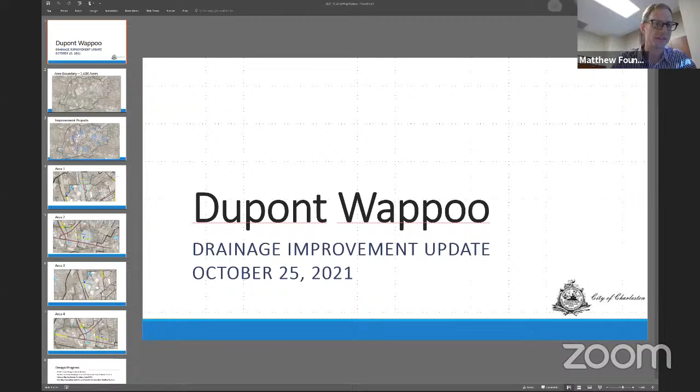Okay. So this is just a brief update on where we stand on the Dupont Wappoo Drainage Improvement Project. And Mr. Chairman, I can actually give you a quick update on the area that we're talking about in that email separate to this as well, as I've been talking to the county about that area for the last few months. But obviously the Dupont Wappoo project area is this large 1,600 acre basin, somewhat focused around the intersection of 526, Sam Rittenberg and Savannah Highway.

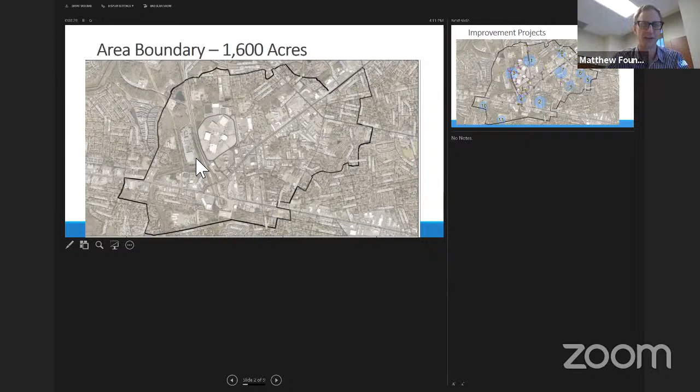We had identified previously, as you're all well aware, 11 total project areas, 10 of which are public projects. The 11th is actually located within the school property, but we did identify it as an area where there was a potential for drainage improvement. It's just all within the public school property under the school's jurisdiction.

Before you go back, you see the areas of 10 and 11, and then at the base of 4, all those little yellow dots down there. I suspect that's Highway 17. Is that Savannah Highway? Yeah, I can certainly provide a little more context here. Savannah Highway is sort of the large double line that runs right across the page here. Well, my question is about that area below that.

In other words, my understanding now is some of this area comes underneath Savannah Highway and eventually goes over by the mall and comes back underneath Savannah Highway out to the Stono. This area where 10 and 11 is. Mr. Chairman, I think instead of it being over on 10 and 11, which is the marsh outfall by Clayton Drive, you're probably looking at this area over by the Ruby Tuesday's south of Highway 17. That's just south of area 2 here, where the new Home2 Suites are.

Right. Yes, and you're right, it's on the southern side of 17 like that. That area does sort of flow either north or south, depending on where the flooding is and where the drainage issues are. We've been looking at this area with the county, a series of a couple of different projects. One in Councilman Appel's district on some of the townhomes down here to add a little bit of storage and improve some of the drainage swale.

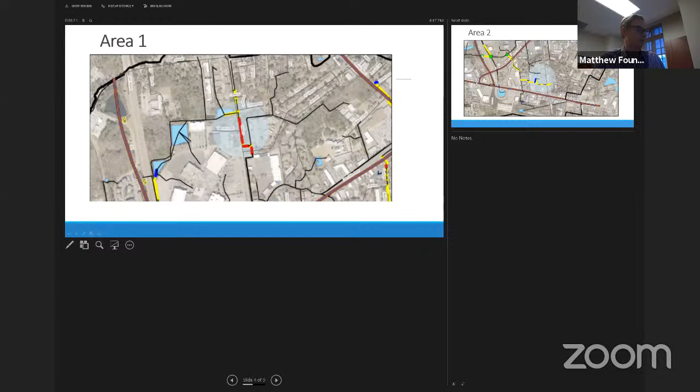These aren't the easiest things to see, but project 1 focuses on Orleans Road at the north end of the Citadel Mall, and the improvements here are mostly looking to provide relief to the Hazelwood, Taborwood area that comes down into this large drainage canal through the apartment complex and then across Orleans and back behind the Citadel Mall.

Those will tie into one of the other projects that we'll see in a second on the area numbers. Area 2 is sort of the area that parallels Savannah Highway. There was previously a round parking lot car dealership here that's been vacant for a little while. And that water flows from Dupont across through Orleans, through the Town and Country property, and then kind of up through a canal across Sam Rittenberg, and then eventually into that Citadel Mall canal system.

Area 3, this actually ties into area 1 that I talked about before. So area 1 was the improvement over on Orleans. That water then has to flow to the north of the Citadel Mall down by 526. This is improving the section that runs parallel to 526 to help the water get down to the outfall. We've been in quite a few talks with the Citadel Mall Epic Center developers about how this should look.

We're looking at an open drainage system right now where we bring it into, in the short term, like a big canal, then in the slightly longer term, working with the developers to build this into more of like an amenity or recreational aspect for the mall property, where they could basically landscape it and beautify it and make it a development draw to the mall property to have a beautiful outdoor water feature that runs through the parcel basically.

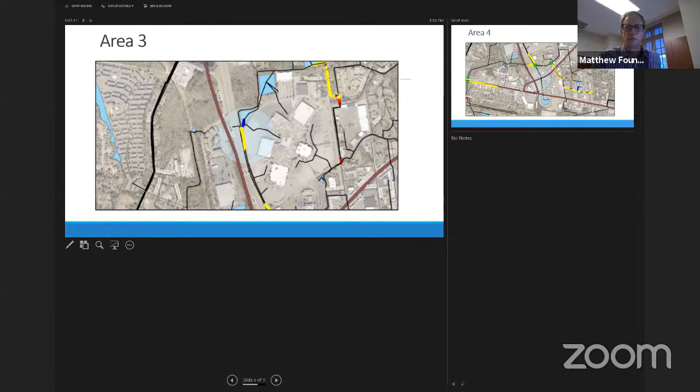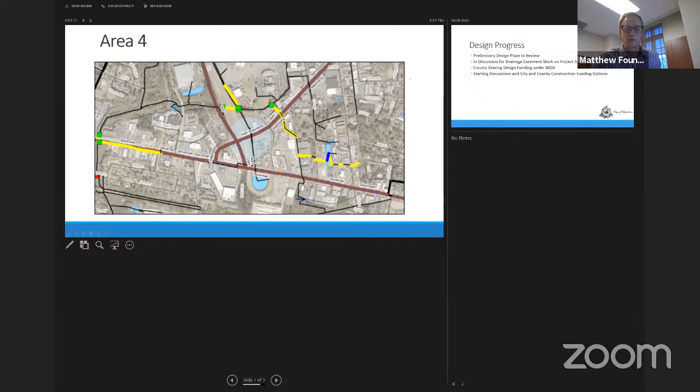Area 4 is actually the improvements on this mall property section here, adding some check valves and limiting some of the impacts when we get major tide events that pull up into the system and eliminate a lot of that open storage capacity. So we do have preliminary design plans complete for all 4 of those project areas. At this point, we've been working with the county to review those design plans so we can return them to AECOM, but the initial design work showed that we were likely to need some drainage easement adjustments in project areas 2 and 3.

Project area 2 is the area that runs sort of from that round car dealership down through the Town and Country. And then project area 3 being the backside of the Citadel Mall. So those 2 areas, we're working with those 2 property owners to see if they'll grant drainage easements and shift easements around to be able to do those drainage improvements. We're also currently under a cost sharing agreement with the county for the design funding on a 75-25 split. And now we've been starting to look at what appetite and financial capability the county would have for a construction cost sharing agreement as we move forward.

Let me ask this. That's 75-25. How did we come up with that split? Yeah, absolutely, Councilman. Both of these projects were being funded out of the utility accounts for the 2 entities, which need to be spent to benefit ratepayers. So we laid it out based on how much jurisdictional area each entity has within the Citadel Mall Basin. The city has about 75% of the annexed area within the basin, and the county has about 25% in unincorporated. That's what I thought, but I thought more of it was in the county than that. There's a lot of parcels in the county, but a lot of the area is in the city because some of the large parcels like the Citadel Mall are within the city.

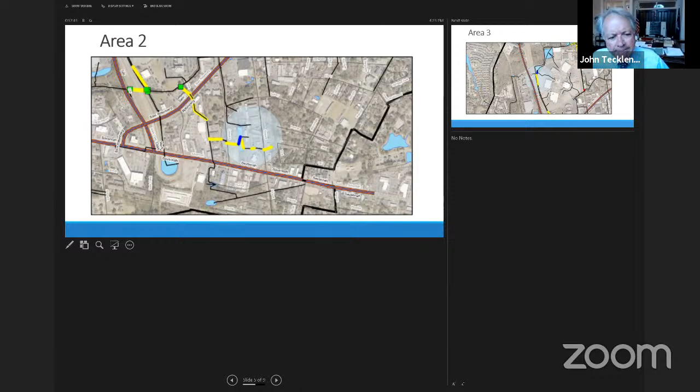So really that little area wasn't identified for one of these projects. We just need to get better easements so we can clean out the ditches better. There are improvements once you get over to project area 9, Mayor, but you can't do those until you get the downstream improvements. So they would be in the next round of major projects. That's why the county and city have been looking at some of these shorter term maintenance oriented improvements to help out in the meantime. Okay.

All right, since by coincidence we were on this area, it's near the area this letter asks us to address. I guess we'll have to sit down with the county and let them know what we're up to, and maybe they can help us get the easements we need. Some of the people are willing to sign off on easements, but that's a little different when somebody comes out there and asks you to sign the dotted line. But hopefully they're going to be willing. Mr. Fountain and then Councilman Shahid.

I was just mentioning, for the LaSalle area, we have found some interest in the property owners towards dedicating easement. Like you're saying, Mr. Chairman, it's not final until people actually sign the documents, but there has been support to get the survey work from the county surveyor to prepare those easement documents. They're just finalizing that now at the county, so hopefully we will have some success on that side. Okay. Councilman Shahid, you had your hand up a few minutes ago.

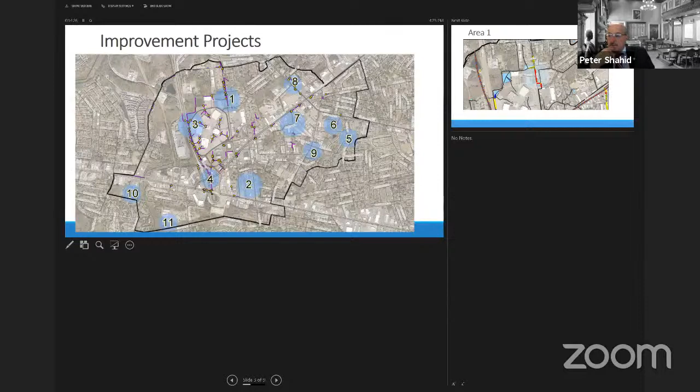I did. Thank you, Mr. Chairman. Matt, would you mind going back to that last slide? Was it one of the project areas? No, keep on going. It had a narrative on it about city. Oh, yes. So we had a design one and then a next step one. I don't remember if you answered this already, but when you're looking at funding from the county and city level, is there a particular formula we use to prorate what government pays what amount on these projects?

So far we've been sticking with that overall ratio for the basin rather than breaking it down into individual project areas, because most of the downstream projects don't have the full impact on the upstream areas, but they still provide some relief even to the upstream areas. So I think we've all felt pretty comfortable keeping that 25-75 split for the meantime. Okay. Thanks.

Just to let y'all know, this area was on my list of requests to the legislature for their infrastructure funds, and I think it's in Representative Stavrinakis's district. I need to follow up with him as well. But if anybody talks to Leon, let him know we'd appreciate his help on some funds for this project. Glad to do so. Thanks for the heads up.

So this is an update as well on the Barberry Woods Drainage Improvement Project. And this one, we've finished the preliminary engineering work, have some recommendations, and are looking for options on how to move forward. So this one's a little bit different in that Dupont Wappoo, we funded all the way through final design and permitting for those first 4 projects, but not yet construction.

Barberry Woods, the council has funded through the concept and preliminary design work, basically building the hydrology model, figuring out what the project would look like, but not yet through final design, because we knew that there would be a significant component of property acquisition in this project, rather than looking for something more like gratis easements that we are in the Dupont Wappoo project. Now I'm going to just give you an update on where we stand with this one and see what the committee's recommendations might be for moving forward.

But the overall project area is about 400 homes, mostly single family with a mixture of apartments in this one development. 250 acres of land, few undeveloped tracts still, especially in this section near the corridor and a little further down Maybank. Yeah, the primary issue on this project, and we'll see some pictures in a minute, is not so much structural damage. Interestingly, it's very long duration flooding of roadways. Most of the roads were built very low in this area, and they'll stay flooded for quite a long time after rainstorms.

So what we did over the last few years is we originally started with a very brief concept plan just to do some basic modeling and see what might be some options out here. That was performed by Davis and Floyd a few years ago. Based on that work, we went out for an RFQ, hired WK Dickson, teaming with Biohabitats, but WK Dickson's the prime on this project, to come back, reassess that H&H model and do a preliminary design evaluation for what level of improvements we could see and what land acquisition and cost would be necessary. So this is the results of that preliminary engineering work.

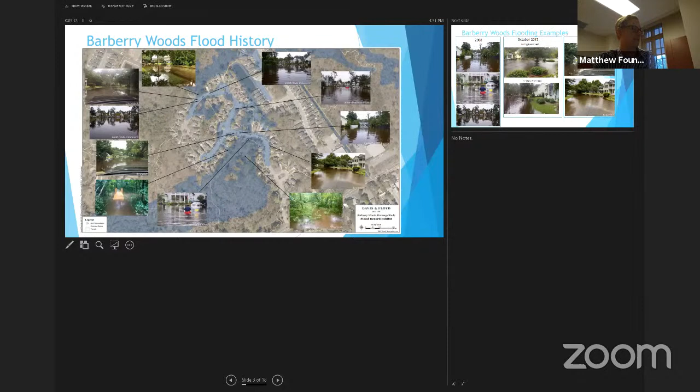Just again, for a little more background, this is a zoom in of the Barberry Woods neighborhood itself, showing in blue the typical flood locations from what we would call a 2-year storm, a storm that would occur on average every 2 years would result in those roads being inundated. You can see the pictures on the map of past flooding events. These started all the way back in 2008 with some of the neighboring developments. And there's a whole history we can get into of why it floods if we'd like to, but it floods pretty badly. Here's some close-ups of the 2008 rainstorm. It was one of the kickoffs that got some attention to the neighborhood.

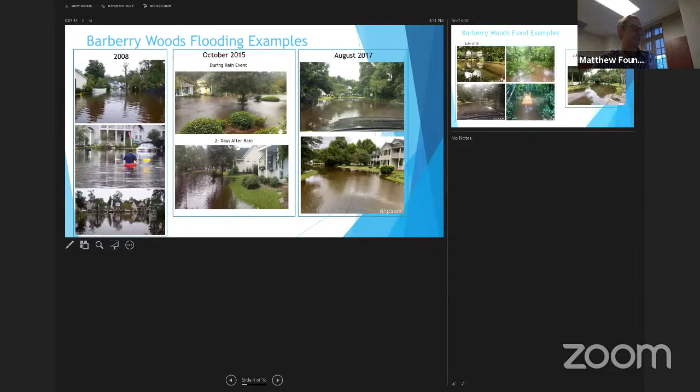2015, it's worth noting this top picture is during the rain event, which is not good, certainly, but 2015 was pretty catastrophic. The bottom picture is 2 days later, 2 days after it had stopped raining. The water is still too deep to drive in and out of the neighborhood. 2017, similar types of flooding. 2018, heavy flooding. 2021, this was the 2-inch rainstorm that we had in July. Closes the street. So again, it's not so much the property damage, which is a little bit different in this neighborhood. It's the inability to get vehicles in and out of the street or in and out of the neighborhood. We did take a look at multiple scenarios because there's no easy project to improve this area, unfortunately, because of how large the drainage basin is and the way it's set up.

When Barberry Woods was built, they basically choked off, to some extent, that water flow, which dried out the downstream areas enough that a number of developments were permitted downstream. And most of this was done prior to the city having not only a stormwater department, but a stormwater manual. Most of this was still being evaluated by the state, but it's the kind of thing we talk about when you look at these basin scales instead of at neighborhood scales.

The problem now is that the easy answer you would think would be to just improve the pipe sizes under Hickory Knoll and let the water go. But what happens then is you actually end up flooding out all these downstream neighborhoods that have been built since then if you restore the original drainage pathway. So you don't have that option. We did look at that option. It does not work. It floods everyone out.

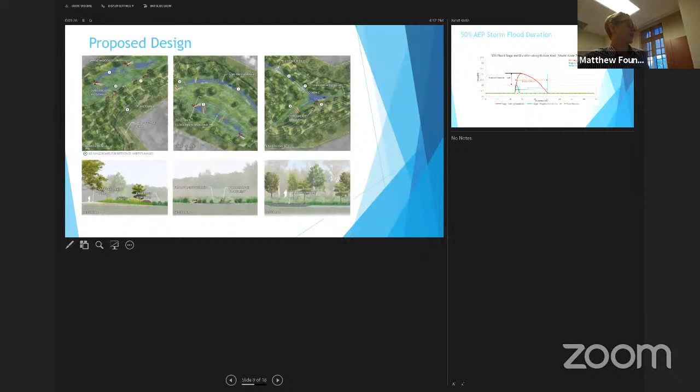We looked at this and said, you could acquire slightly less property and just build this as a giant pond in a dirt canal. Right. But you lose most of the secondary benefits of natural preservation and passive park space for people to go walking and birding and fishing and other things that we were trying to keep in the project. Right. So we looked at what the improvements would be for this approach.

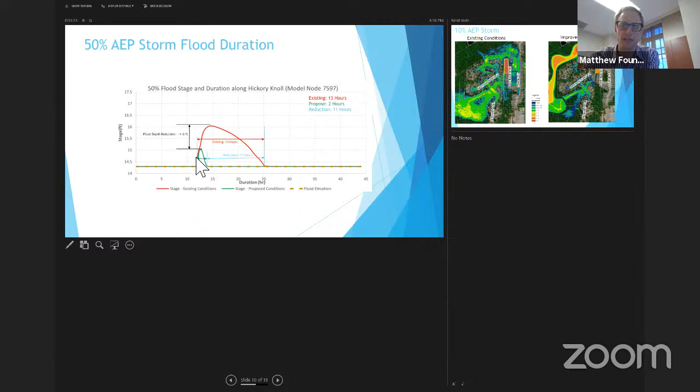And here's a graphical look of the existing condition and improved condition, where we basically go from widespread flooding, especially this yellowish color which is the worst flooding, to taking most of the flooding out, even in a peak condition. But there is not a complete removal of flooding from this project. The roads are that low that there's no way to completely get water off the road.

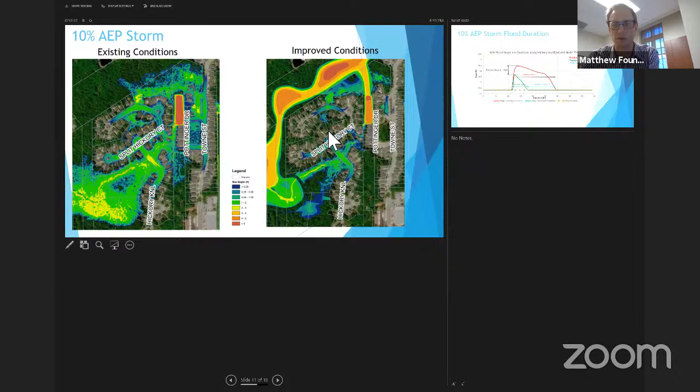We're mainly looking for that reduction in how long the water is on the roads, so that you can get people in and out of their homes to get food and groceries and have emergency vehicle response. So I'm just curious, what's the elevation of that road? So this is one of these interesting things, Councilman Waring. Most of this area is at elevation like 20. It's a localized low area versus everything around it. So it's a bowl basically within a high area. Yeah.

So how could we have avoided, I mean, hindsight being 20/20, given our drainage manual today, a developer comes in with a situation like that, what would happen? Yeah, so that is one of the big differences. Zooming all the way back out, without trying to make everybody sick, to what this looks like. So what happens now is if you come in to develop, say, this parcel here,

you have to model what the watershed looks like, not just how much water my property is generating and making sure it's the same before and after development. Before, it was how fast you discharged off your property before and after you developed. Not how much water, but just how fast the water came off at its fastest time. But what it didn't look at was how water flowed through your development.

So for this development, they were able to put that pipe into the existing drainage system and then discharge their water out the back of the drainage system. But they didn't look at how much water is trying to get through that road they built. So there was no evaluation of what that pipe would do to the overall basin. Oh, gotcha. There also was not an evaluation of the fact that you're releasing the water at its fastest point at the same speed, but you're releasing it that fast for much longer.

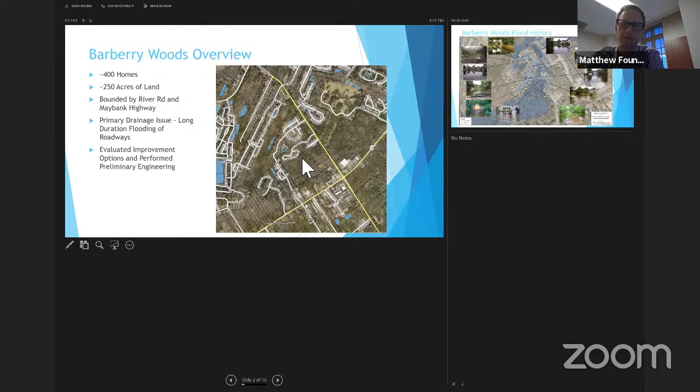So you're generating much more water. So now, in these areas of known flooding, we also make them restrict how much total water they put out, not just how fast they discharge the water. So it's the difference between looking at how do I keep my own site from flooding, basically, versus how does my site not worsen flooding within the watershed. Okay, gotcha. And the new manual is exactly designed to stop this kind of thing from happening.

So again, looking at the storms briefly, this is the 10% storm, currently 17 hours of flooding. We're reducing it down to where you're only seeing peak flooding for a couple of hours, and then it tapers very quickly off from that. This is the hurricane event style storm, a 1% storm.

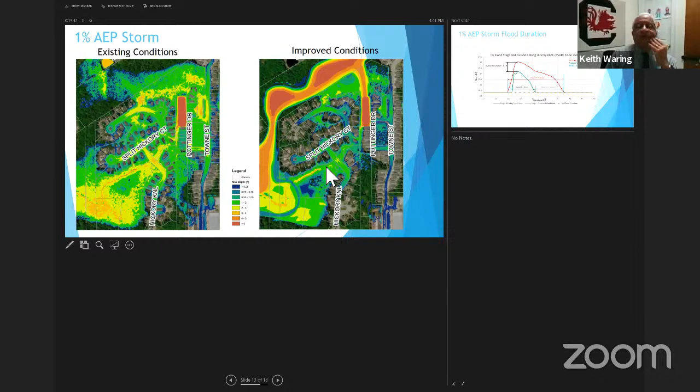Again, you're still going to see some flooding, but in the peak previous flooding, you're looking at 3 to 4 feet in the deepest parts of the roadway out here, which is where you're seeing it almost come into the houses in those pictures. Right. We're looking at diminishing that significantly, where you're no longer threatening the houses, and again, drawing down from that flood depth very quickly rather than having these long extended floods.

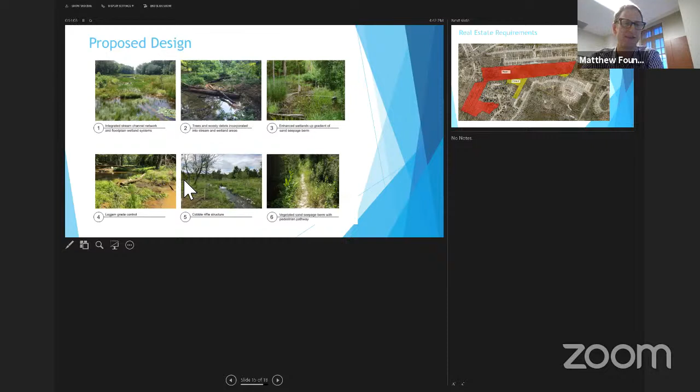Here's a couple of pictures of what it would look like on other example sites. We're all familiar with the beauty of Charleston, of the rural areas of Charleston, so we're trying to bring some of that back into this area. Real estate requirements. This is what you were asking about, Councilman Waring. There are a series of parcels in phase 1, which would be the red.

The largest parcel here is one of the more difficult properties in that it's an heirs property tract. There is a single homeowner on the tract now. You can see the front section. The current proposal leaves the front 6 acres of the parcel in the hands of the original property owners, including where the homestead is, and only takes the back 20 acres, which are mostly wetland

and lower lying areas. But of course, that's going to be a difficult process and involve a lot of negotiation and trying to figure out what we can do with the family to see if that'll work. Understandably, the family has concerns about it being their property that gets impacted. We've looked at a lot of different approaches. Unfortunately, they're not wrong in that to some extent it's the only parcel left to work on.

They feel, I think, a little bit like they're being punished potentially for all the development the city has allowed in the area, and that's not incorrect. The reason that we're choosing it, though, is not because it's an heirs property, but because it really is the only parcel that's left undeveloped. And we're doing as much as we can in the upstream sections on other parcels, but there's only so much water we can store in this area. Most of that flow has to come through here.

That's why we did look at the alternatives analysis through the developed neighborhood of how many homes we'd have to impact. And that's why we still recommended this approach. You'd still end up with an acquisition on the heirs property for that last part of the conveyance, and you'd impact probably 16 to 18 occupied homes, which is something we always try to avoid. But there is HOA property within here.

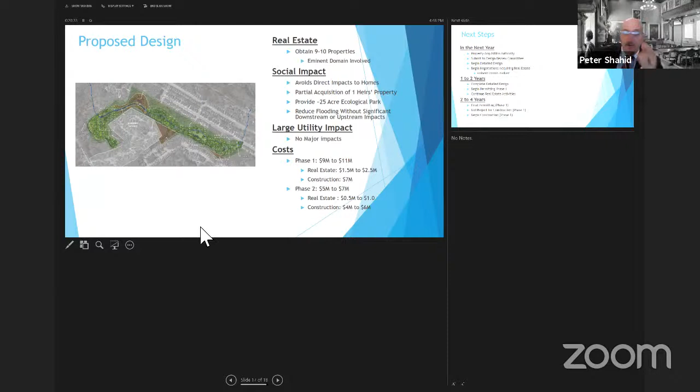Councilman Shahid. Thanks, Matt. Would you mind going back to that screen that had the properties in that red shaded area? Yes. Right here. So the properties, the 9 to 10 properties that you are proposing that we obtain, maybe by eminent domain, which ones are those again? The ones in the red? So the red is phase one. Okay. Those would be the phase one properties that we have to have in order to make the project work. So there's this larger parcel here, which is the heirs property. It's about 20 out of the 26 acres.

There's a couple pieces, I think, from the HOA in here, which the HOA from Barberry Woods has said they'd be happy to gratis grant. I mean, again, they have to actually do it. Nothing's final until it happens, but they clearly have a stake in reducing the flooding. And then there are 3 properties along the Maybank corridor. I believe these are all owned by a single owner, if I remember right. It's the back half of these properties.

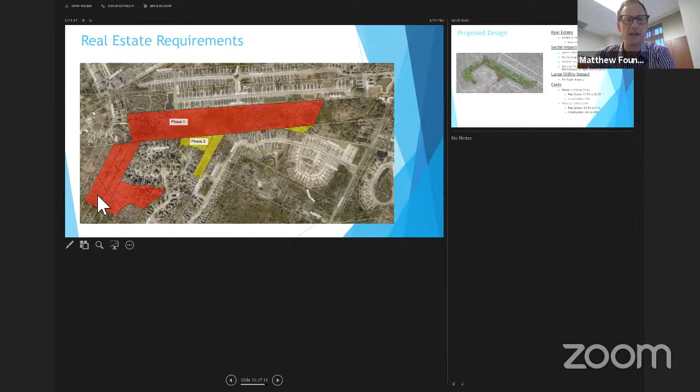Are those properties subject to being developed, or are they just wetland areas that will never be developed? So the front of those parcels is certainly likely for development. There's some slightly higher area along Maybank. It has frontage along Maybank. Let me see if I can switch to a different picture again. Sorry, I'm trying to make everyone sick. So this blue shading through here, Councilman, is basically where the wetland sits.

Okay. So you can see there's some frontage on those properties that are probably pretty high quality. There is a wetland, and then there's some slightly higher area in the back if you get across the wetland. So what we would look to do is basically start the acquisition around where the wetland is and say, well, we would take the wetland for storage, and then we take this higher area in the back to basically dig out and turn it into wetland and make it part of the storage on the project.

So they are acquisition, but they're less expensive acquisition, both to reduce costs to the city, but also because the planning department has shown a preference for trying to get some development along the Maybank corridor here to provide services to the citizens on Johns Island. So the property that fronts Maybank may still be available for some level of development.

Yes, absolutely. So a lot of the developments you do see on Maybank tend to be pretty shallow developments because of that wetland to the back. These parcels are pretty narrow generally. Instead of it being a long, narrow property, what you typically see is 2 or 3 of these being combined together into development along the front of Maybank. Yep. Okay. Which is likely what the current owners are thinking of, I would imagine. That helps out. Thank you.

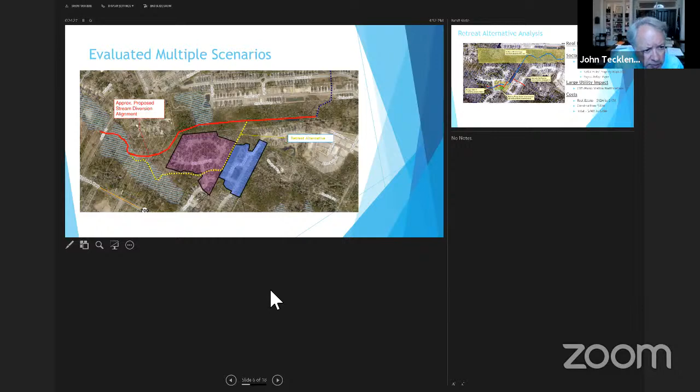Mr. Mayor. Matt, you mentioned the blue shaded areas, the wetlands, and if that's the case, it doesn't look like that Ayers property, the bigger one, has a lot of wetland. It looks like a little smaller blue area there. Yeah, we have some more detailed wetland work for that one, Mayor, that I don't have pulled up here, that there is more wetland on that.

If I remember right, this is, I'm blanking on the name, basically the national wetland database that the US government maintains. I see. We have done a little bit more field level research in the area where we think wetlands actually are from the aerial photos and from the ground elevation. So there is more wetland on this property, but it's certainly not all wetland. There are high spots as well.

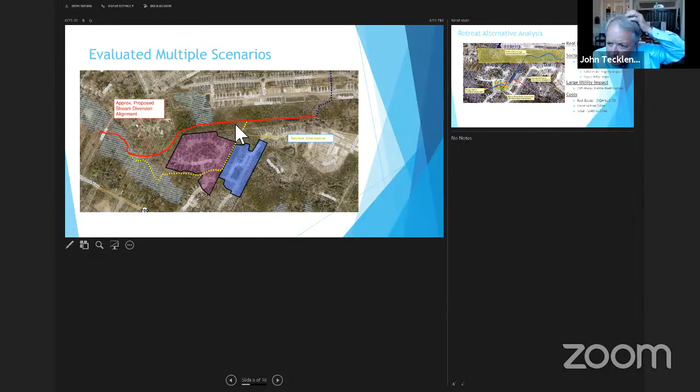Well, Mr. Chairman, if I may interject, I certainly like the concept. When I see the drawing, I think it's the next slide, it appears as a park. I think it could be an amenity to our citizens over there and have trails and some exercise component and natural component. So that certainly seems preferable to taking 16 homes out, and at the same time almost make another park for Johns Island.

A thought went through my mind a minute ago whether, once we got it under contract, we could even apply for some Greenbelt funds to help pay for it. Thinking the same thing.

I was thinking of that, Mr. Mayor, and also I was wondering, Mr. Fountain, you know, when you create wetlands, what is it? I only know a little bit, enough to be dangerous, but isn't it sometimes you can get credit or something like that, or maybe you can sell credits or something for creating, mitigating wetlands?

You can, Mr. Chairman. There's a few options for it. You can actually create a formal bank that is basically eligible to sell the credits, or you can use them as credits on your own project work if we have projects that need wetlands. So that, or we could partner with another entity where we were to create.

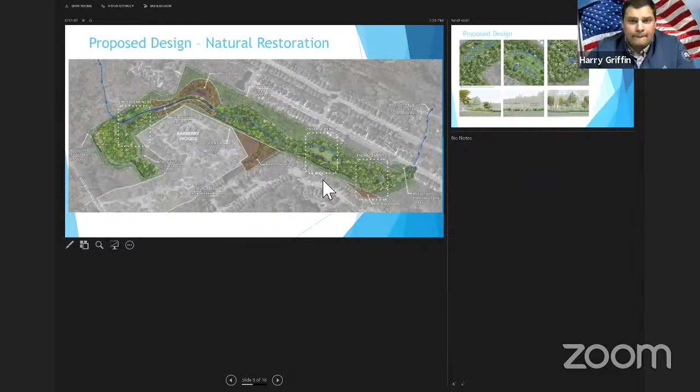Well, let's entertain a motion here for Mr. Fountain, one way or the other. And Mr. Chairman, that was the next item on the agenda, was basically if Public Works Utilities Committee was interested in recommending us to advance to Real Estate Committee to talk about property acquisition with the project. So moved. Second. Properly moved and seconded. Is there a question, Councilman Griffin?

I just want to make sure that we're moving forward to real estate with the understanding that we're not at this point putting any money towards it. I think there's a lot of different revenue sources that we talked about, grant applications, things that can be done. I would hate for us to put the cart before the horse and say that we're going to spend several million dollars that we may or may not have when there's definitely some funding sources out there. And I like your point, Mr. Mayor, about seeing if we can get some greenbelt funding. I think this could be a good opportunity for that.

But at the same time, we're going to need to make sure that we're not going to be counteracting the completion of 526, because there's no way that Charleston County is going to support us if, for any reason, they feel like they could use this corridor as off ramps. But I still think there's a lot more questions than answers, but I really like the design concept, and I'd like us to send that to real estate. But I would hope that we wouldn't be acting on this too quickly.

And just very briefly, Councilman Griffin, there is a relatively significant amount of funding that had been previously allocated out of the drainage fund for the project. So we're not asking for any new funding at this point, because there's plenty of funding. I should never say that. There is what we feel like is beyond sufficient funding for real estate acquisition and design purposes in the currently allocated amount of money. Again, whether or not we choose to go forward with the project depends on whether we spend that money, but it is not any new allocation of drainage fund resources for the project.